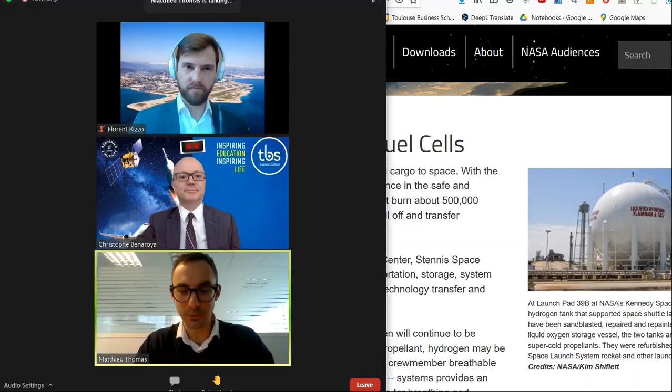I'm really glad to be with you today for this conference. I have to admit that I'm quite impressed by the number of participants, more than 100 people, so it's a really good sign to see that the question of climate change and aviation is important for the future business leaders that you are. Obviously, the challenge of climate change is an extremely important topic for Airbus, and that's the reason why we've recently revealed to the world that

we have the ambition to develop the first zero-emission commercial aircraft by 2035. So the objective of this conference is to share a little bit more information on what's behind the ZEROE project, what's behind the scenes, to speak about hydrogen, and to speak about

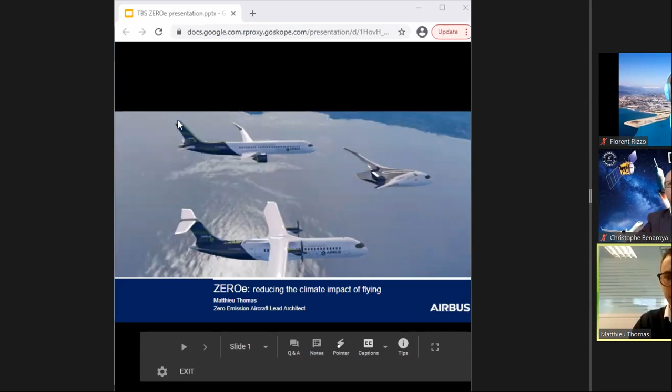what could look like future hydrogen aircraft. So I might have to share now my screen. Okay, and tell me if it's fine for you. Yes, yeah, it's showing on the screen. Okay, great, okay, so let's go.

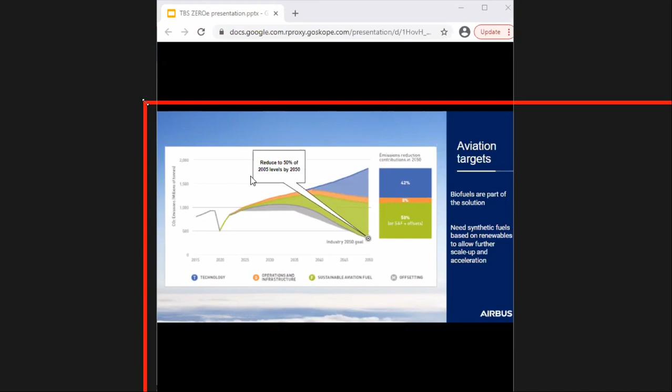Let's go, and I will start by giving a little bit of context. The first thing to know, and I'm pretty sure you're well aware of this, is that the aviation industry has set itself very ambitious CO2 target reductions. This target is minus 50% of CO2 emissions by 2050 compared to 2005 levels.

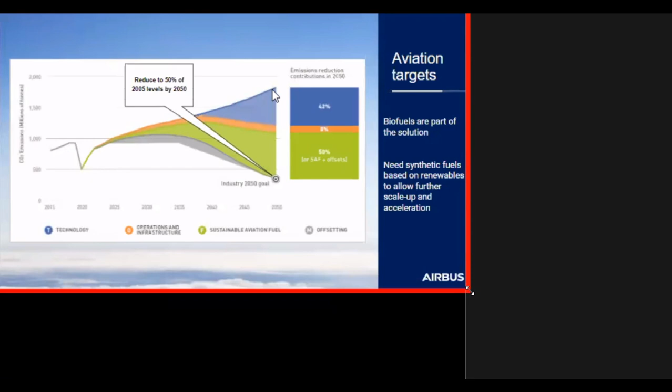If you see my mouse, my pointer, just tell me. Can you see my mouse on the screen? Yes, we can see it. Okay good. So if you see it, if we do nothing, we will follow this curve, the top one. Let's say this is the COVID crisis, and obviously the emissions of aviation will continue growing as the traffic growth is increasing. But we know where to go to reach our objective, which is here.

We have three main enablers. The first one is the continuous improvement of the technologies on board the aircraft, which enable a decrease in fuel consumption. So that's what you see in blue. There's also everything that deals with aircraft operation, optimized operation, including air traffic management. And then there's the use of sustainable fuel, like biofuel or synthetic fuel made with renewable energy. This is obviously a major, big part of the CO2 reduction.

So we know all these solutions, and we know that we have to accelerate them to reach our targets. But on top of all this, the challenge is that the story is not only about CO2 emissions. The complete challenge is about the climate impact, which means it's also the complete greenhouse gases, which are for us CO2 for sure, but also NOx and contrails. And we know that contrails and NOx can potentially have higher impact on the climate than CO2. So it's extremely important to consider the complete picture, not only the CO2.

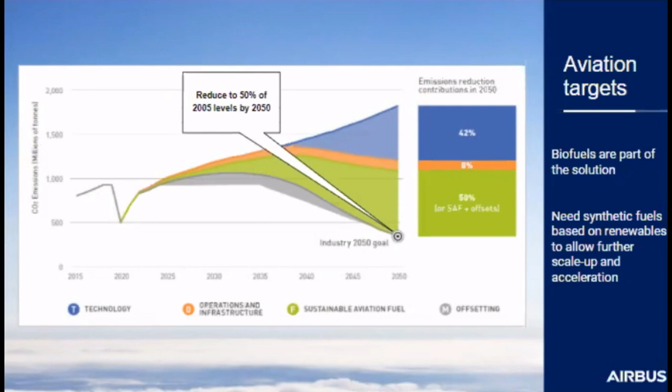So we're conscious of this, and we're not the only one. We already see the evolution of local regulation. We've seen, for example, in June 2019, the UK, which is the first major economy to pass a net zero emission law, followed by New Zealand, and even in Europe. Europe has stated extremely ambitious targets in terms of greenhouse gases, more than half by 2030, and climate neutrality by 2050. So we see things evolving rapidly, and it's clear that societal expectations and regulation will request aviation to go to zero climate impact. And we believe that the only way to achieve this target is using hydrogen. It's the only fuel for commercial aviation to enable zero emission ambitions.

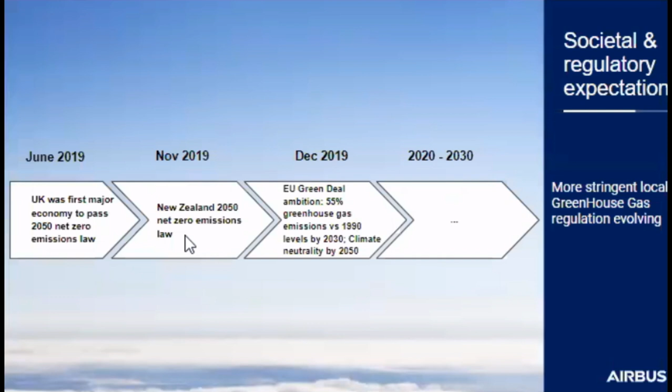One point on renewable energy, which is a very important topic. Why? Because if we want to use hydrogen, we have to use green hydrogen. And green hydrogen is produced with electrolysis. So we use electrolyzers to dissociate water into oxygen and hydrogen. So as to operate this process, you need electricity, and you need electricity coming from renewable energies. It's important so as to get green hydrogen.

What you can see on these charts is that renewable energy is starting to scale at an incredible pace. For sure, in absolute terms, they're not at the level all of us want them to be, but the pace of growth is really significant. On world wind electricity production, it is doubling every 5 years. Here you can see between 2013 and 2018, but it's the same growth between 2015 and 2020, just that the International Renewable Energy Agency has not published these last results.

Concerning solar electricity production, the growth is even higher. It's times 5. You can even see that the slope of the curve is really steep at the end, nearly exponential. And that's because even without subsidies, in many regions, renewable energy starts to be cheaper than fossil fuel. This is obviously a very important aspect in our strategy, since we need low-cost renewable energy to produce low-cost green hydrogen, and in the end, to make H2 aviation real.

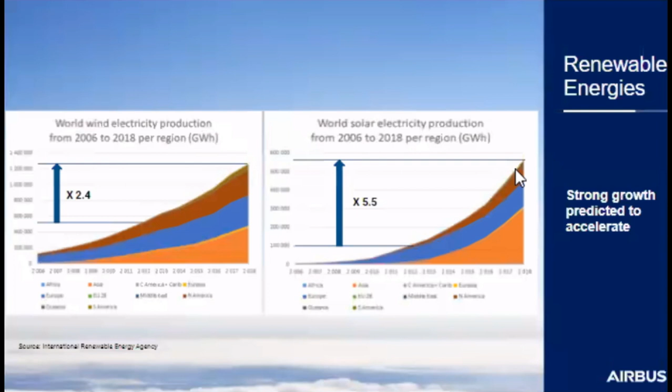Another important topic is the hydrogen ecosystem. We need to track how the hydrogen ecosystem is moving and developing. Behind ecosystems, there's obviously the states, the nations, the energy producers, the hydrogen producers, and also all the consumers. We've been looking at this hydrogen ecosystem for several years, and what we've seen during the last year is an incredible acceleration of this H2 ecosystem.

We've seen, for example, Japan, which was already for a decade a world leader in hydrogen, state even more ambitious plans for hydrogen, putting hydrogen at the heart of their roadmap towards net zero greenhouse gases by 2050. In Europe, it's the same - the H2 strategy has recently been updated, making clear that H2 is a key building block towards climate neutrality and a zero emission economy. That's the same for China, Australia, and some other countries.

On the demand side, the consumers of hydrogen, we also see significant developments. We've seen, for example, last year, 9 different truck concepts powered with hydrogen popping up. On the shipping industry, it's the same. And it's interesting because there are many parallels between the shipping industry and aircraft - we have ships, we have ports, we have airports, but we have the same kind of operation with point-to-point routes, needing really localized hydrogen infrastructure. So there's a strong parallel between them and us.

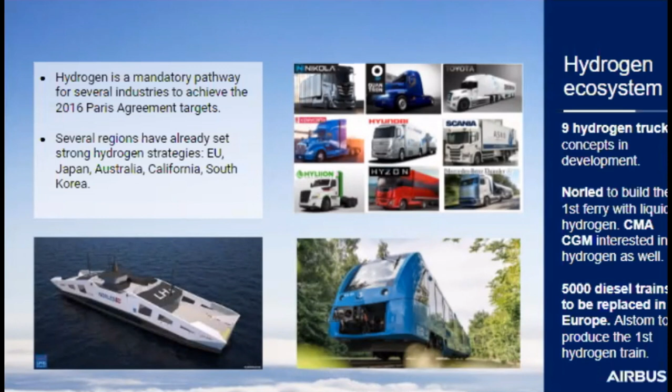There's no point developing an aircraft which is extremely climate friendly if it does not achieve any market, and by consequence doesn't have any climate impact.

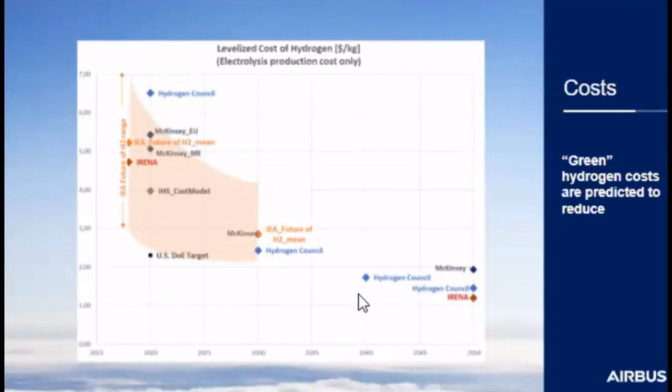So that's it for the content. Let's speak now a little bit about aircraft, and more specifically about the zero emission aircraft.

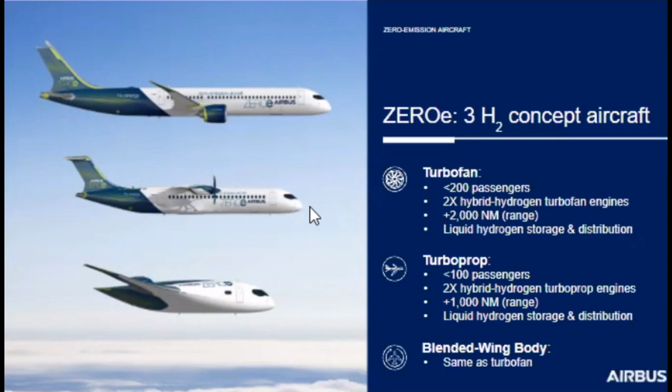The propulsion system is different. The fuel system is different. The distribution system is different. The non-propulsive systems are different. There are many differences, and the idea of the following slides is to enter a little bit into the detail to show you what the differences are.

And feel what it could look like in the end. But before doing this, I think it's important to come back to the basics and understand what the hydrogen specificities are and how they impact the aircraft design.

So the first thing to know about hydrogen is that for the same amount of energy as kerosene, it is 3 times lighter. So it's obviously very good news from an aircraft performance perspective.

Bad news is that it takes more volume to be stored. If we consider hydrogen at atmospheric pressure, ambient temperature, and sea level, the volume needed to store the quantity of energy contained in 1 liter of kerosene would be higher than 3,000 liters for hydrogen.

So it's definitely not an option to store it like this in the aircraft. It will not work. One of the options is to pressurize the hydrogen. If we pressurize hydrogen at 700 bar, we reduce the volume from 3,000 liters to 6 liters. It's typically the option considered by the automotive industry. You can see in the Toyota Mirai, they have this kind of H2 tanks pressurized at 700 bar.

But for an aircraft, the weight and volume are extremely important, and we do everything we can to reduce them. The thing we can do in addition is to liquefy hydrogen. If we use liquid hydrogen, we reduce the volume of hydrogen to only 4 liters. That's the best we can do.

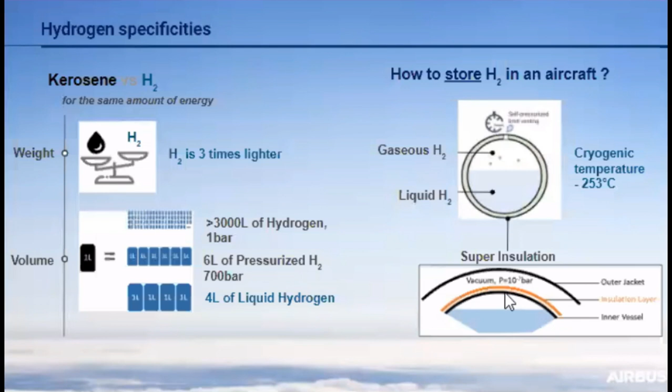Now that we understand we need these LH2 tanks to store the hydrogen, where do we locate these tanks? I hope you understand it's not an option to store liquid hydrogen within the wings. Even if you create really small tanks and put them inside your wings, the weight penalty will be too high. So you have to find other locations for the LH2 tanks.

There are several options. The first one could be under the wing, what we call a podded aircraft. This concept is quite interesting because the liquid hydrogen is really close to the engine, and for maintenance, the accessibility under the wing is a good choice. But obviously it creates some drag and puts at stake the efficiency of the wing. So if we'd like to keep an efficient wing, we need to put the LH2 tank elsewhere.

It can be above the cabin, or even after the cabin, after what we call the rear pressure bulkhead, an unpressurized compartment at the rear end of the aircraft. This configuration is quite interesting, especially the caudal option, because this aircraft looks like a classical aircraft, which is good for passenger acceptance.

The tanks are quite accessible, but it has other drawbacks, like a quite long distribution system for hydrogen. And you put a little bit of weight at the rear end of the aircraft, quite far from the center of gravity, which degrades the performance a little bit. Nothing dramatic, but there are always pros and cons in any design.

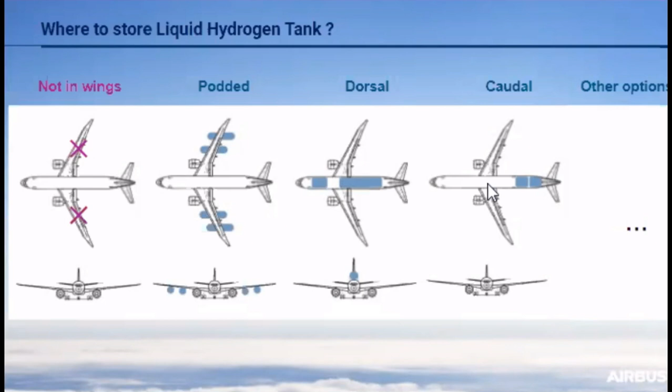Now that we know how to store liquid hydrogen and where to store it, how do we convert it into thrust? There are two big options. The first is to use a gas turbine, which looks like a classical gas turbine. That's what we call H2 direct burn. The gas turbine is similar to the ones you have today on engines, but it has some specificities.

The combustion chamber is different, really specific. The injectors are specific. You have cryogenic heat exchangers to heat up the liquid hydrogen to a temperature acceptable for the engine. There are many other different components, you have H2 pumps obviously, so there are many things to be developed. But what is sure is that we know it's feasible.

It's already been demonstrated a long time ago, in the 50s by NASA on the B-57. Even the Russians did it on the Tupolev, in the 80s. So we know it's feasible, and we're already exchanging with engine manufacturers. The feedback we have is quite good, because they see many opportunities in using hydrogen to revise the engine cycle and get even more performance than what we have today.

The second option is completely different: using fuel cells. Fuel cells do not create thrust directly. They provide electric power, which we then use to power electric motors, propellers, or fans, and create thrust that way. I may have to remind you a little bit how a fuel cell works.

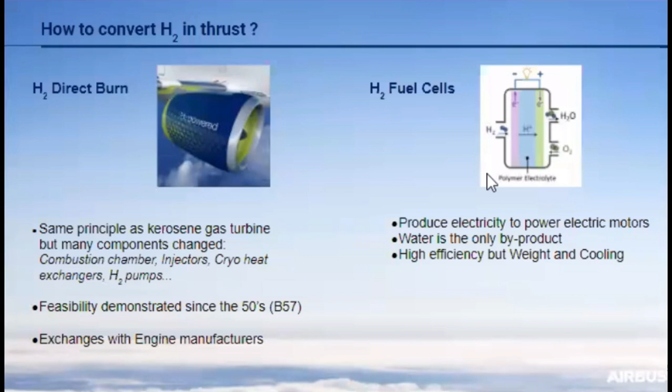So these are the two different propulsion systems, and obviously we can combine them. That's called a hybrid architecture. In this architecture, you have liquid hydrogen stored in liquid tanks, which feed a gas turbine. This gas turbine provides most of the propulsive power, but it is assisted by electric motors, and these electric motors are powered by fuel cells, which are fed by liquid hydrogen.

So here you have a heat exchanger so as to convert liquid hydrogen to gaseous hydrogen at the right temperature to operate the fuel cells. And the idea is to use the heat dissipation of the fuel cells to enable this exchange. Such architectures are quite interesting because they open new degrees of freedom for the optimization of the gas turbines and increase their efficiency.

There are a lot of different hybridization strategies, with low power hybridization strategies or high power strategies. High power, for example, boost in takeoff or climb is interesting. Low power, you can have, for example, assistance during the transient phases, where you can increase the efficiency of your gas turbine.

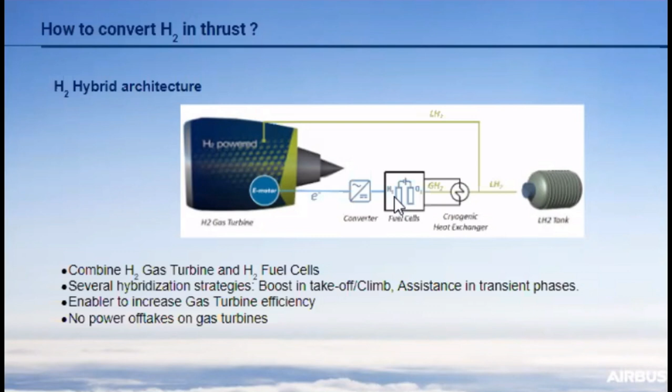Okay, so that's it for the hybrid architecture. And this hybrid architecture is the one we've selected for the ZEROe concepts that we revealed in September last year. So if I look a little at this regional aircraft, I think now you have all the elements in mind to understand what's behind.

There are obviously several enablers for a hydrogen aircraft. The first one is performing technologies. It's really important to have the right, really efficient technologies. Why? Because this kind of hydrogen aircraft is a little bit penalized by all these different systems in terms of weight, and also penalized by additional drag due to the longer fuselage than a legacy kerosene aircraft. So we need to embed really efficient technology so as to minimize this penalty and potentially even be better than a kerosene aircraft.

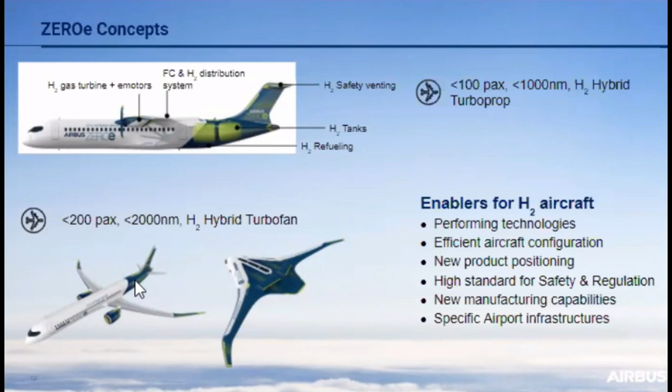There's a last configuration you may have seen at the very end of last year: the pod configuration. In this concept, the aircraft is only powered with fuel cells, and you have 6 pods of about 1 megawatt class — that's the order of magnitude for the power. Each pod integrates the complete propulsion system from the LH2 tank to the fuel cell, to the electric motor, and the propeller. It's a quite innovative concept that we're working on, part of the exploration phase we're doing.

So you can see that we don't focus on one kind of architecture. We really are open-minded on everything which is possible.

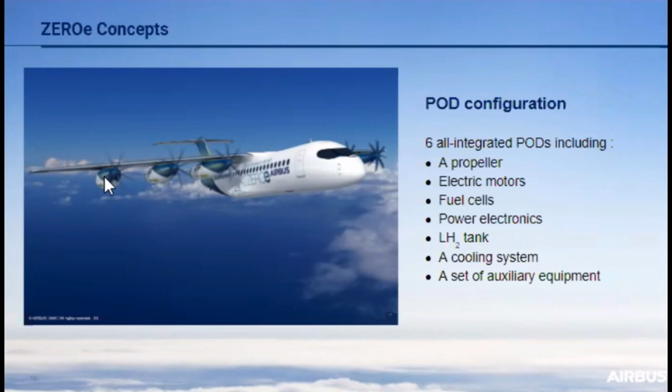I'll finish with some key dates. This project was launched already in 2018, 2-3 years ago. Last year it moved toward a pre-program launch, so it's really official now and we revealed it to the world. It's already quite a big thing, looked at from all different perspectives — there's the team working on aircraft design, the team working on the ecosystem, on the economics, on the value for an airline, on the climate impact, on industrialization, manufacturing, airport, safety — all the different aspects are covered.

We take time to define what is the best concept, the most resilient concept for the uncertainties we have in the future — what are the key technologies we need to develop, take time to develop them, demonstrate that it's feasible. Once we've done this, by 2025, select the product and go toward entry into service, which should be before 2035. So that's it for this presentation.

I think it was the last slide. I'm pretty sure you have some questions. I hope you enjoyed it and learned things. I tried to be really transparent and make an accessible presentation for all of you. So now I'm really happy to answer any questions you may have.

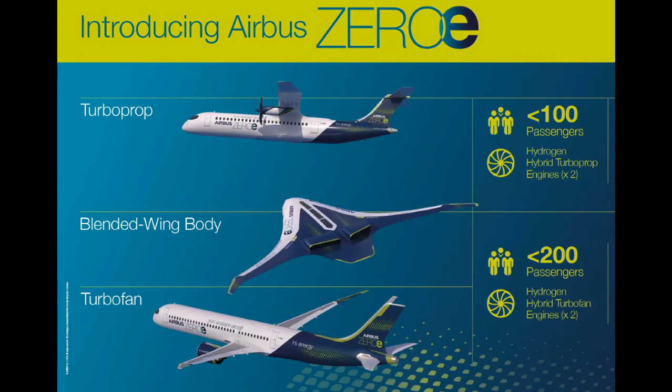I think one of the key challenges regarding hydrogen is the possible impact on storage and on airport infrastructure to store this massive quantity of hydrogen which is required. This echoes some of the questions we get from participants: how do we incorporate these operational constraints into your project, and is there any collaboration planned with airports to facilitate the deployment of the ZEROe aircraft?

Yeah, exactly, I think the answer is yes. We're taking these questions of how to operate an H2 aircraft extremely seriously. Our intent is not only to focus on the aircraft but to look at the complete ecosystem, and the airports are obviously part of it. So yes, we're working with some airports to understand what it means to have hydrogen at an airport. Can we have a hydrogen hub, an airport where the aircraft could be refilled but also used? Hydrogen could be used for many other applications in the airport.

So there's a question of what kind of development strategy could be defined. It's a question of safety, of security, of where to locate all these elements. So we're discussing all this. There are a lot of questions about the impact on the people who will operate the hydrogen aircraft, in terms of training and certification — even firemen will need specific training for this. So we're looking at all these aspects, and we're very well supported by the airports, and also by the people who are really operating the aircraft, the ones making the services.

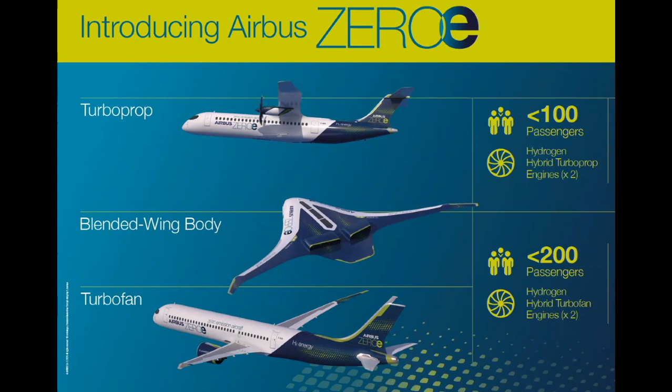Indeed, thank you very much, Matthieu. We also got some maybe more technical questions that could be interesting. One of them was, how do you think of a process in the engine to extract hydrogen during the flight itself? This was a first interesting technical question. And there is another one: is there a way to make the hydrogen solution have a higher boiling point without affecting neutrality of the fuel emission?

Okay, I'm not sure I understood the first question, can you repeat it just to be sure I capture it? Do you think there is a process for an engine to extract hydrogen during the flight itself? To extract from? I guess from the sky itself, or you mean... okay, from the external air. So in fact, you don't find hydrogen like this in the air.

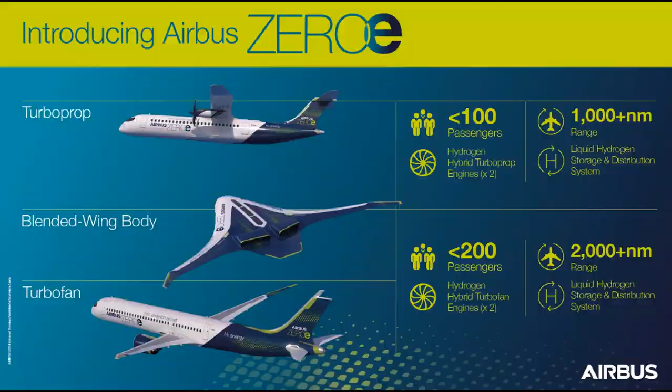So the TRL, technology readiness level, of fuel cells in aeronautics is relatively low because it has never flown - it has only flown on very small aircraft, not on big commercial aircraft. For the gas turbines, that's the same - it flew in the 50s, but it was a demonstrator, not something optimized for performance and so on. So there are a lot of technologies to be developed.

So the current technology readiness level is lower than 3 for the time being on all these technologies, and we will try to learn about them and develop them in parallel as we are exploring. When we have to decide on the concept we want, the technologies we have selected will have to be at a TRL level of about 6. When you decide what aircraft you'd like to launch, the technologies generally have to be around TRL 6. So that's what we target. That's the reason why, in parallel to the exploration stream, we are working a lot on technology development internally, but also with many suppliers, engine manufacturers, and partners.

So that's a big stream of activity, including demonstration - ground demonstrations - so as to see that it's really feasible and to learn a lot really rapidly. In the end, we even plan to make flight test demonstrators to reach the highest level of TRL, which means putting the technology, the new systems, in real operating conditions - not only ground tests, but real flight tests.